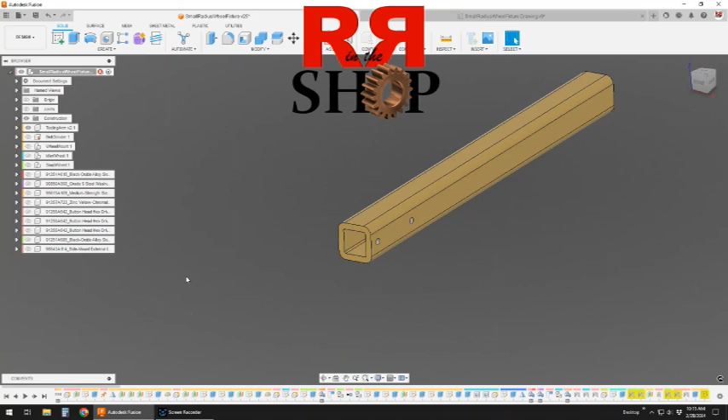Hello everybody, Randy Richard in the shop, and today I'm going to show you a small radius wheel fixture that I'm going to build for my 2x72 grinder.

Now this could be adapted to any type of belt grinder, whether it's a 2x48 or any 2x72 really. They all work basically the same way. It's just the mounting maybe and the necessary adjustment for where the wheels will track and stuff like that. So this is more of a conceptual thing that you can modify for yourself.

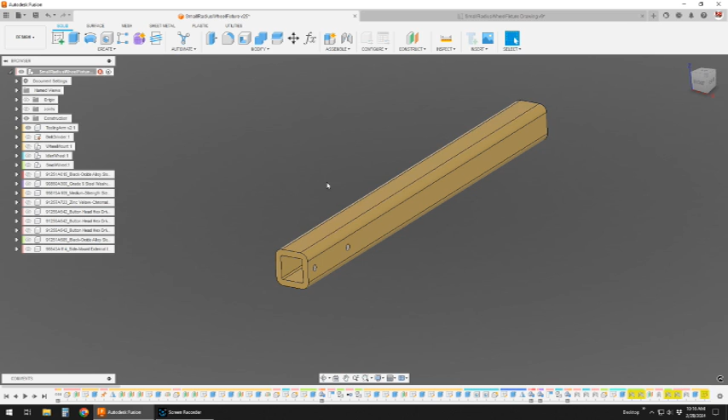Anyway, mine takes a 1.5-inch square tube for the tooling arm that slips into a 2-inch square tube, like a lot of them do. Now the tooling arm is one thing that you would have to adapt to yours. So this is my tooling arm. I've also drawn in some parts of my grinder, the drive wheel down here.

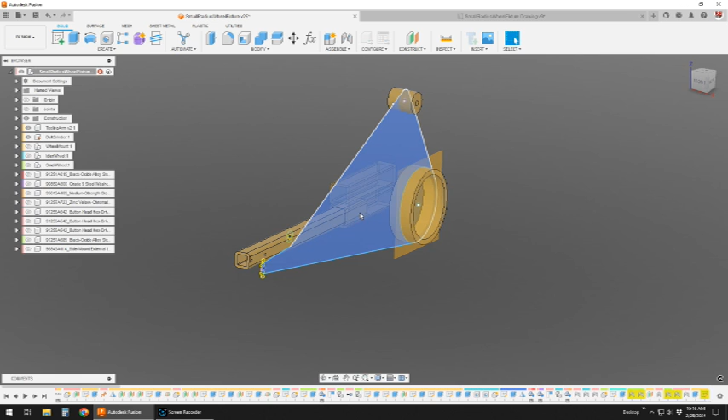The idler wheel on the top, which is also the tracking wheel, and then the two tubes that allow for the mounting of your tooling with whatever you have, a platen here or whatever you want to put in here, table or whatever. So this gives me my heights so I can adjust what I'm building, right? This is your basis, and then the tooling arm, of course, is in here.

Here's the basic attachment we're going to build, and it's all made of aluminum. We have a 1-inch thick stock here, 6 inches long, about 3 1/4 or so high, something like that. This is another little cross member, and then the right side over here, which is 1/2 inch by 6 inch by 1.5 inches aluminum plate.

And we're just going to screw it together. There'll be some button head socket screws here, and there'll be some screws coming in from the other side. And then these two down here are the mounting holes to the tooling arm. And this hole up here is for the idler wheel.

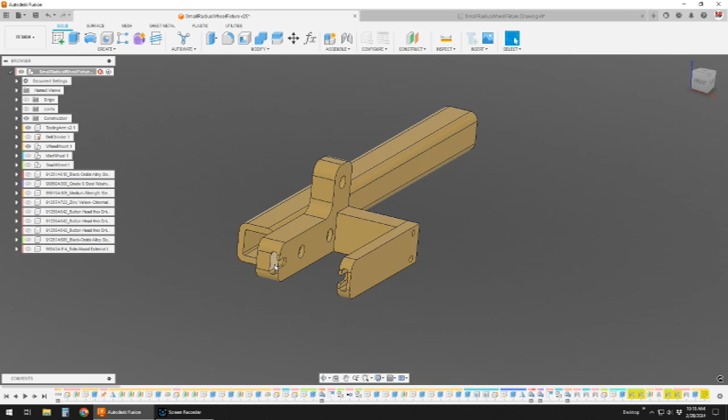And then in the front here, the small wheel will just slip in here, because the belt will hold it in. So it just needs to slip in, it doesn't need any fixturing to hold it in place, really. So it just slips in there, and that makes it easy and fast to change.

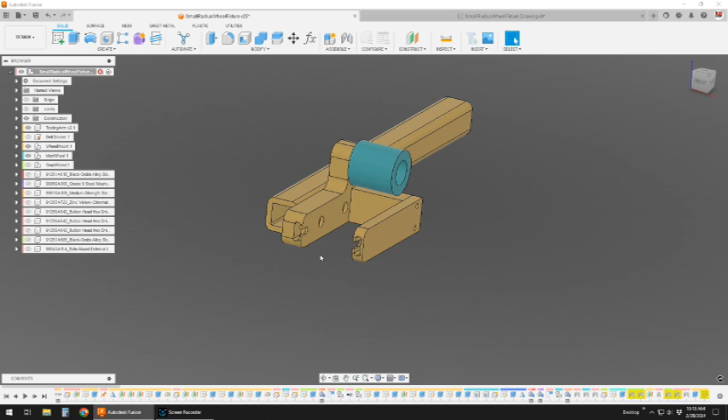So the idler wheel will sit up here. I drew in a 2-inch wheel, and you could have the belt come over the top of it if you want, or from underneath. My idea is probably going to run it from underneath most of the time. It gives you a tighter radius to be able to grind because of the acuter angle on the small wheel.

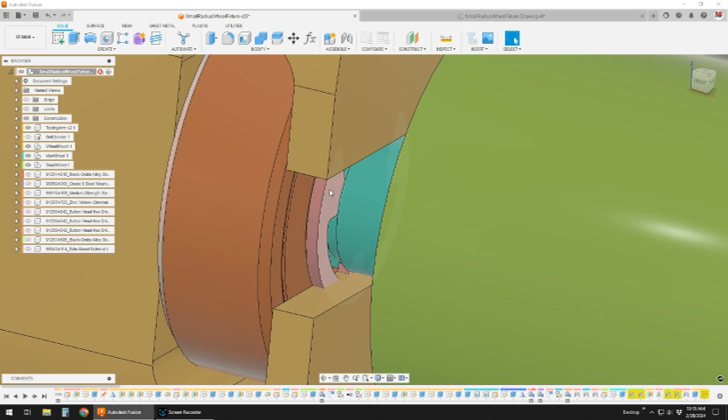And the small wheel will slip in the front here. It has 2 bearings on it. I used a 5/16 shaft, and then the bearings press on there nice and tight, and that works pretty good. I also designed in there some E-clips, as you can see here, that little purple piece, and a groove.

Now, the material I ended up with was high-speed steel, which that's not really what I wanted. I'd rather use a W1 drill rod for this. It makes it really hard to put in a groove. You have to grind it in with high-speed steel.

But it's a very nice stiff shaft. So I did make one with that, and I'll probably make some more. But if the bearings press on tight, you really don't need to put a groove in for a clip. You just press them on so they're flush with the end, and you're good to go.

But I would suggest most likely using a 5/16 drill rod would be a little bit better, because it's ground to size, and it's a little more accurate that way. And the 5/16 high-speed steel ones I got, actually you measure them, and they aren't really the same size the whole length. They actually have a slight taper in them. So one bearing fits tight, and then the other bearing is on there nice, but you can pull it off. So I'll probably be adjusting for that.

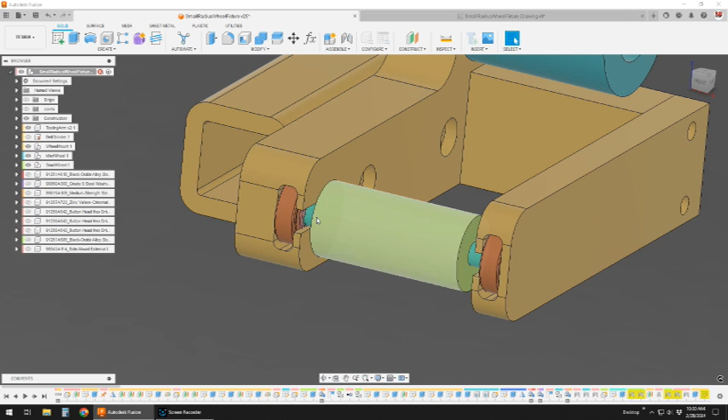But anyway, you want to have some good material for your shaft here. And then your roller, solid aluminum is fine. You can make them out of anything. People have rubber ones. You can buy rubber ones that are already made, and they're expensive.

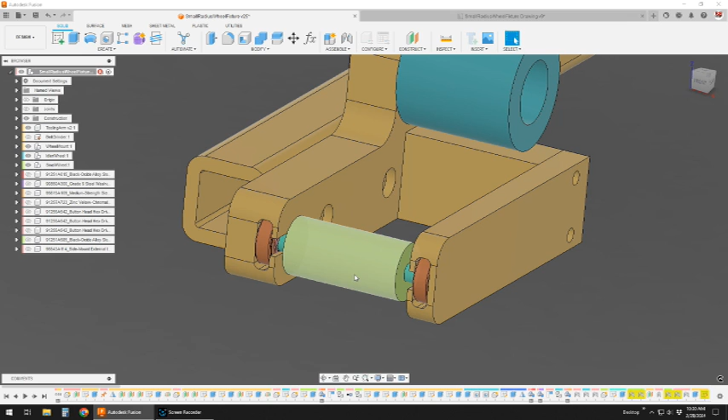As far as I'm concerned, they're expensive. $65 a piece, roughly, and that's a little pricey. So I'm going to try to come up with some other method of having some type of soft roller that you could do in your own shop, but we'll see where that goes.

So anyway, that's about it, really. We'll have a bolt, that bolt's a little long on the side, but we'll have a bolt in there with screws and washers and all these button head screws and socket and cap screw down there, button head screws there.

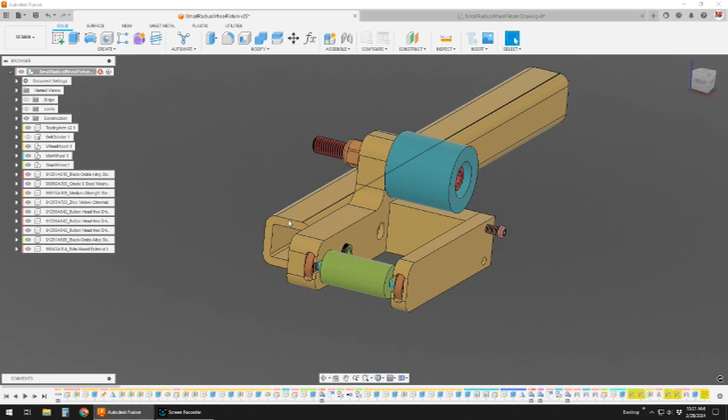I have to do some refinement. I changed some design parameters so things aren't 100% here, but I'll get everything adjusted so the model is actually correct. It will be an as-built model eventually. But right now, I want to get going on this. I need to use it, and so we'll get things more complete by the time I'm done.

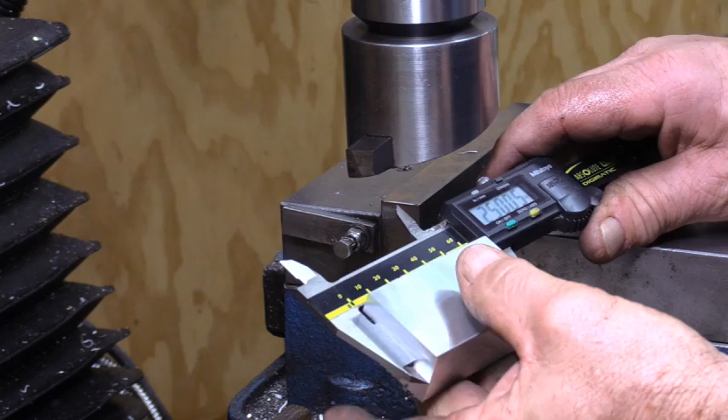And I wanted 2.5. I got 2,499. Close enough.

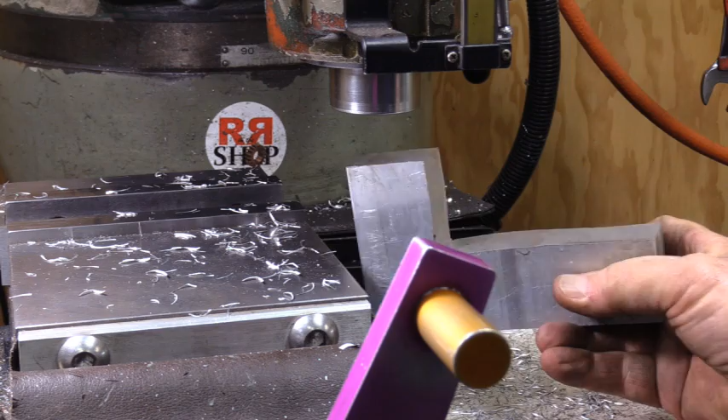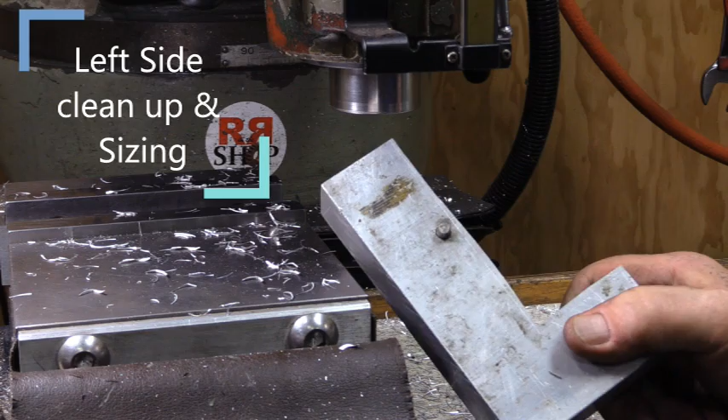So this is going to be the left side, and it's about an inch and just under an inch and a quarter. This is from an old fixturing plate from a friend of mine who has a machine shop, and some of these pieces have dowel pins in them that I cannot get out, but I have a scribe line just above it. I'm going to try using this anyway - it may be a hindrance. If anything, I'll grind it down so it's flush in the end. But yeah, I'll have to work around that.

So we're going to do some cleanup on these two faces here for squareness and get it to length. The other ones are easy - they're just blocks, right? So this is a little shy actually of 6 inches. Maybe I'll shorten the other one. I'll probably shorten the other one up to match this one in the end that way. But that we just got to work around.

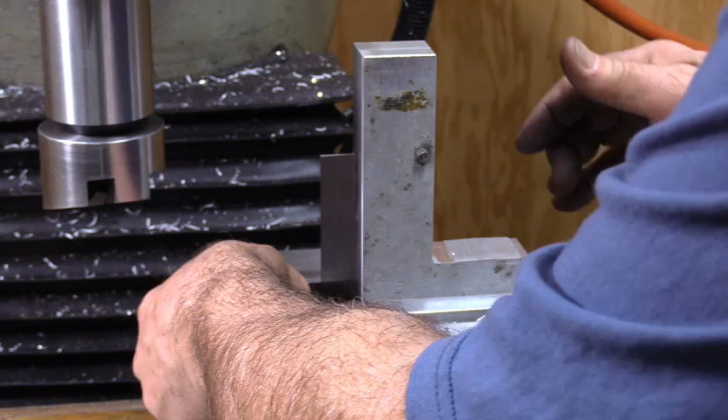I'm going to have this in here. So the back side, I'm using that side I marked as a reference, and I'm going to use this one as my reference also, so I marked it. I'm putting a square in here because this bottom is not square to this base, and neither is this. So we're going to clean up this one and make them all square.

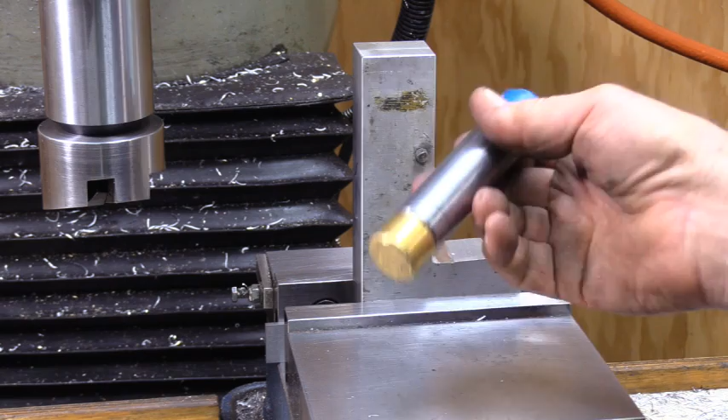A knocker is perfect for this sort of work when you're having to tap things around, with the brass end and the plastic end, and being dead blow. It works absolutely awesome. Just taking off less than 5/1000ths just to make sure it's square.

Yeah, see, it's a little bit off. See, it didn't clean up. There we go. I know it looks a little sketchy, but for a light cleanup, this is going to be fine, and it's aluminum. This is about all the things you can do with a fly cutter.

The thickness of that leg really doesn't matter too much. So we'll clean it up, measure it, and see how I am according to my drawings.

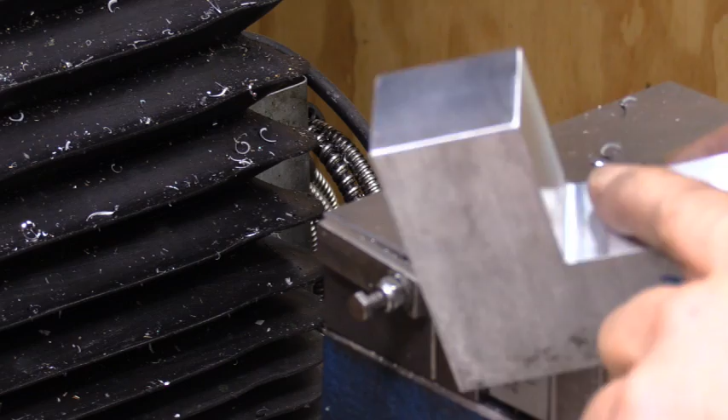Here, when I clean this surface up, my tool doesn't have enough, or it has very little rake in this direction, and I pushed over a little too much, and that's why this got hit here with the tool. So I have this little spot here. I'm probably just going to leave it that way so I can maintain my nice thickness here.

But things happened. I centered up on the pin. I was able to file it, so I'm hoping it's not super hard. And I've deformed it - I had it clamped in a vise trying to get this thing out. I'm sure it's a 1/4 inch pin, and I'm just going to stay under a 1/4 inch here.

Well, it looks better than a pin. I think I'll just stop where I'm at. I could see part of the pin then still in there.

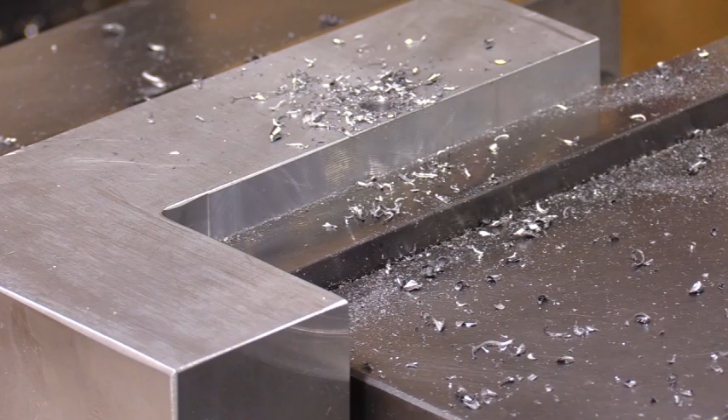Now I'll go in with a 1/4 inch drill. Well, I drilled it all out. Now I just have a 1/4 inch hole to deal with.

This is 1 1/4 inch thick material, and I'm only going to need really about 1 inch. I'm going to say about, because of the irregularities in the grinder and things like that. So I think it's going to be less, about 0.9375 is my number, but who knows until I get this more mounted on there. I'm going to take it for those 1.5 inch width. I'm going to take off a 1/4 inch to start with to get things gauged, and I just have a 3/4 inch end mill in there where I'll just hog it out.

All right, all the holes are spotted in and saved in the DRO just in case I need them, but I will need them to go back. It saves you a few steps sometimes. This is the 1/2 inch hole.

Now I'm going to counterbore these from the other side so I can set the socket head cap screws in a bit.

Now I'm going to counterbore down with this drill. I have these button head hex head screws I'm going to use to attach that cross member, and they're only 1 inch long, so I'm going to go down 1/2 inch with a counterbore for that head.

Those will be just very nice, just right. All right, this side's done. Flip it over. We'll do counterbores on these two holes from the other side, and we'll dress up the other sides of these holes. Then after I get all the holes drilled, I'm going to start the slot on the end.

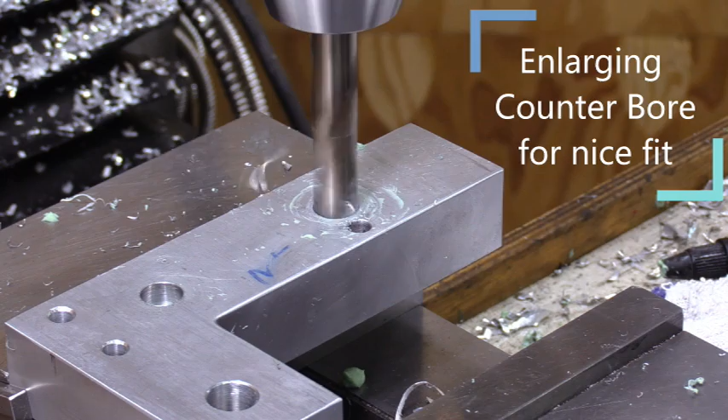Counterboring with a 1/2 inch drill. I want to maintain the tight clearance on the 5/16 hole, because these are 1/2, but a little smaller, so I didn't want all the slop from a standard counterbore.

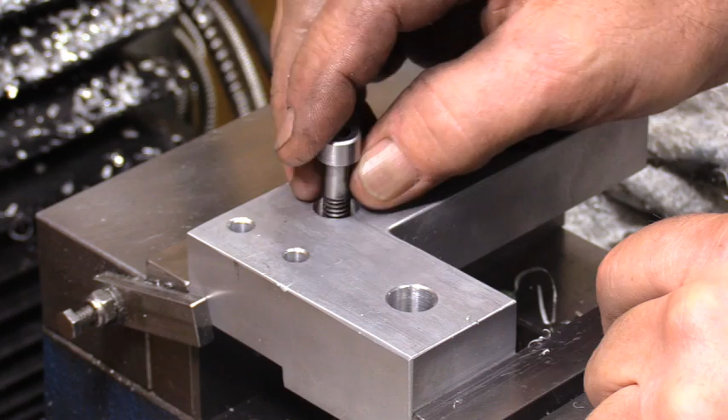So I turned these down to just under about 494 or 5 or something like that. So they fit real nice, look at that. They look, and I made them so they're nice on the top. Yeah, there you go. They made them look really nice.

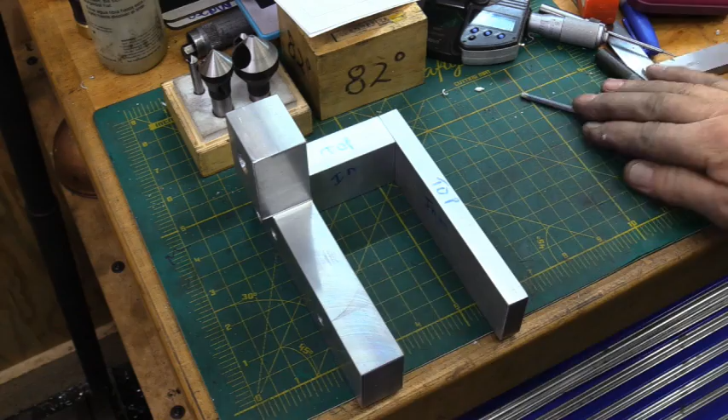Okay, I slipped it together, went together absolutely perfect. We are like perfectly flush across the back, which is awesome, and flush on the bottom. So let's see here, we'll just do a quickie check.

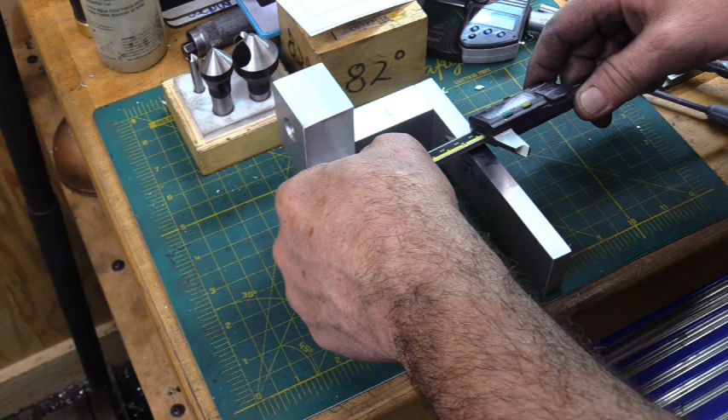We are 494. And we don't even want to talk about this now. 462. So why do we have like 30 thousandths? Well, who knows, but I don't know why. Anyway, that's what we ended up with. 494, yeah. 264. Yeah, 264. So for some reason we got about 30 thousandths narrower up front here.

All right, on that test fit up, what I've done is I checked this, and this is not flat. A ruler across here has quite a bit of daylight in the center section, in the middle. So this is nice and flat.

This looks really good. So what I'm going to do is put this back in. I never cut this side, never machined this side, so I'm going to take a little bit off of this and make it flat, because this is where it's causing that deflection. So we'll clean that up.

Over here, my cramped little workspace I'm using. Okay. Yeah, grab the right one, I guess.

Okay, measure back here, we get, what do we get now? 24995, and that's how long that block is.

2510. Oops, yeah, 2510. 499. Oh no, well here I'm measuring 2510, 25. Yep. So that's 1/1000th of deflection now after fixing that. That's awesome.

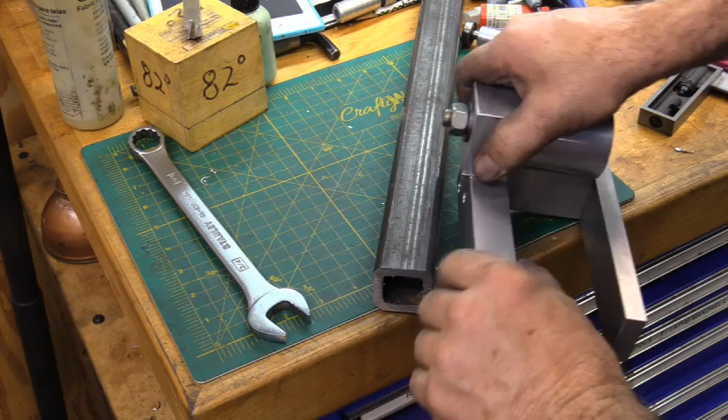All right, we're ready to put the slots in the ends. We're going to start with this side, and I'm going to cut in and cut out a center portion, and then the slot will actually be wider and deeper than this. This is to give me clearance for the shaft, and if you put a snap ring on, so you have some place for it to go.

All right, we got a T-slot cutter in here. This is an 1/8 inch thick one, and it's about 763 in diameter. So I went down to the lowest point we'll need to go, and we'll go in. Then we'll just shift over and come back out again.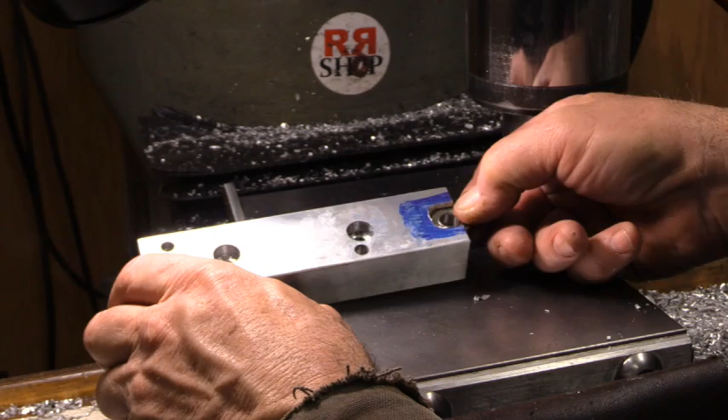We'll clean her up. What I'm going to do is put a 1/4-20 set screw on here, on the top and on the bottom, so this is in there and it can go up and down. And what it's going to allow me to do is move it like this a bit, and that will help so I can get the front roller tracking properly.

If I'm having a tracking issue, I have my main adjustment, but if they're still a little off for some reason, I can adjust this roller up and down and get the tracking better on the front roller so the belt doesn't move around. I have these nice 1/4-20 brass tipped set screws I'm going to put in.

There we go, this is going to work awesome. Drops right in, real nice. And we have these set screws here that we can adjust up and down. You'll see here there's some movement, and we can get the tracking perfect on this front wheel that way.

It doesn't really matter which axis you have this adjustment, whether it's front and back or this way, it really doesn't matter, because all you're doing is sloping this. Actually this way is probably really nice, but as you turn that or move it in either direction, you are going to make the belt go back and forth, so you can adjust your tracking. I made a spacer, like I said already, for this.

So that goes in there. This will go here, we're just using this nut for now. Now we just need to make a tooling arm and get that bolted on.

The mail just came, and I got a package I wasn't expecting. Right On with John Crane, Bainbridge Island, Washington. Let's see what we got going here. What's John sending me?

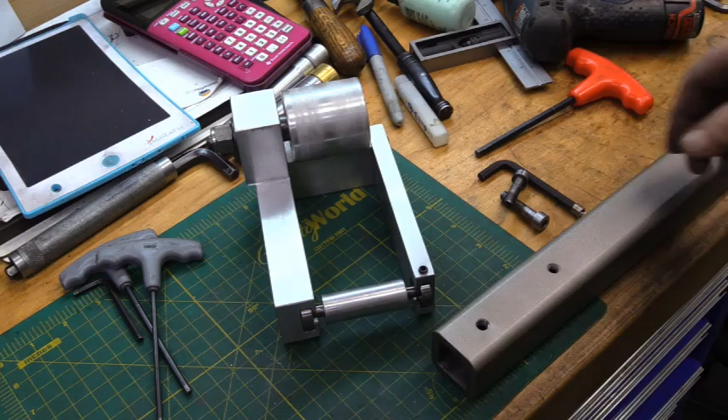Let's get it on the wall. Yeah, we got it all painted, drilled. These are just 5/16-18 holes. Hopefully they line up. Did not test this on that. Going right in.

Okay, looks awesome. I think I'll make a Delrin pulley for this spot here. I don't have any bearings, so I need to get some bearings, but I think I'll upgrade that and make it a Delrin one. I think a urethane one would be really good too. Okay, we'll just put in the bottom one for now.

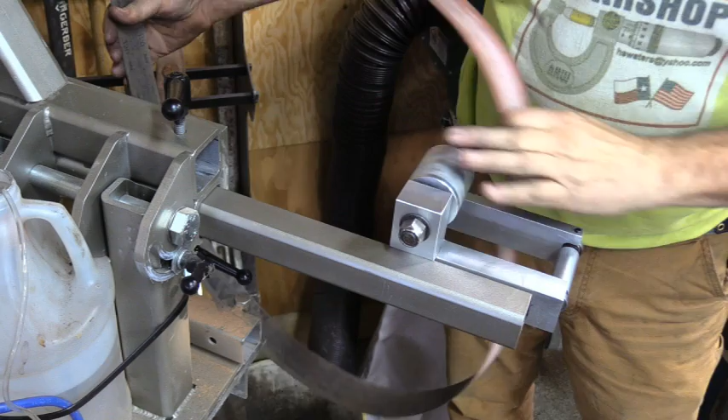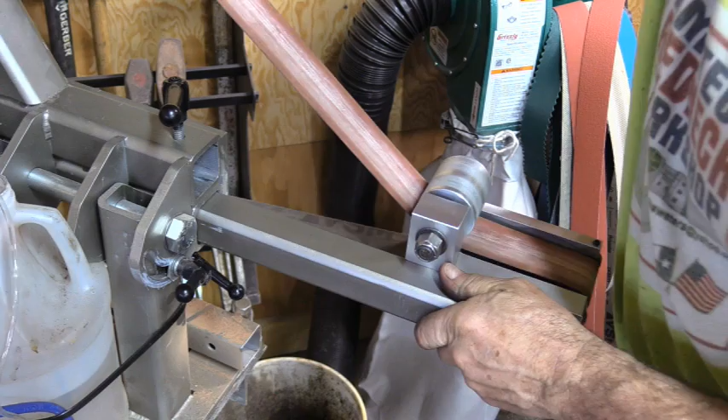The single-sided mount on this is the way to go, so you can just slip it in there, really easy. See how it goes, do a little track on it.

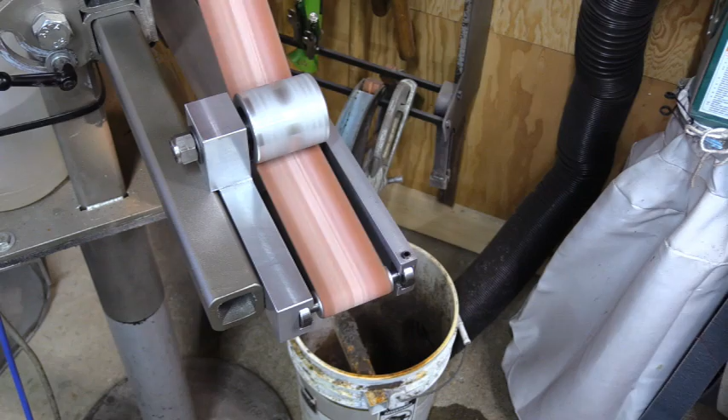That is just awesome, that is just working beautiful. There you go, nice and fast. It's rare that I even run my belts very fast, you'll get your abrasive to last longer, but usually I don't run them very fast. But there, that'll be awesome.

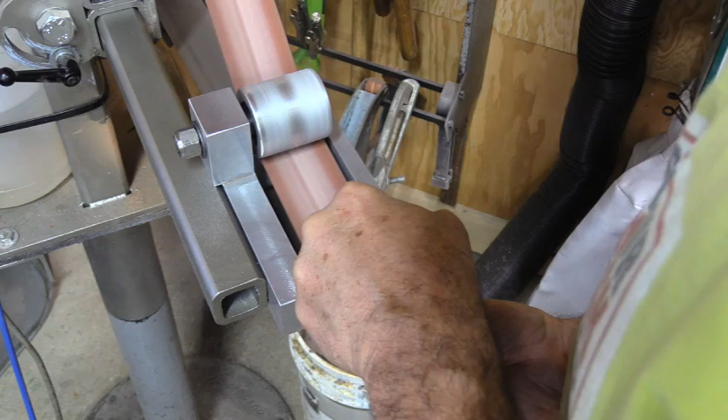Oh yeah. It's a pretty fine belt, that's like a 120 belt. That is beautiful, beautiful. I mean, for knife making, this will be awesome.